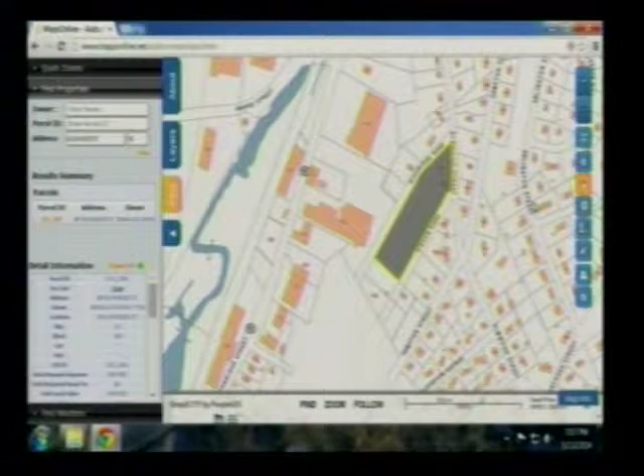Did you dig it out before you put the regrinds on? Yeah, I dug out wherever it was, basically to level it out, then filled it up with about 10 to 12 inches of stone, and put the regrinds on top of that. Well, this isn't a public road anyway.

Yeah, it's a private road, but there were some issues with the neighbor - they were always getting stuck down there. They're very happy now with the road. The neighbor at 90 Elmwood Street was always bailing her out and pulling her out because she used to get stuck, and we've resolved that issue. So overall I think it's a nice plan, private road.

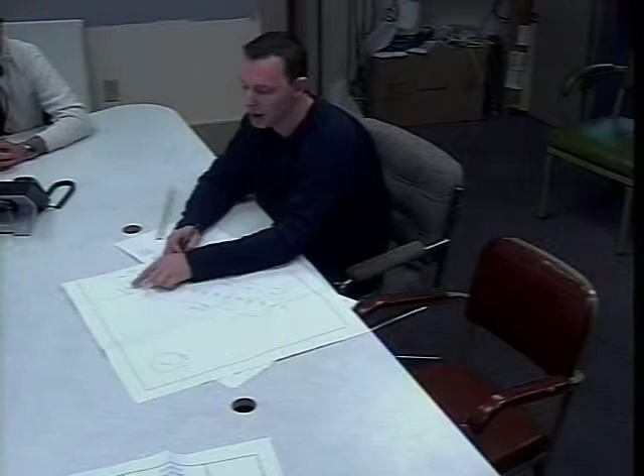There was enough frontage when I met with the engineer originally. The lots are big enough where you need 100 feet of frontage in a 10,000 square foot lot. I could also upgrade High Ridge Road, but after driving down there, that road only goes about a third or half of the way in right now, and the grades really are not very good on High Ridge Road.

So after meeting with everybody, I just decided to go with what that small little community of 2 neighbors that I talked to wanted, and try to get their support.

All right, does anybody have any questions to ask?

This is the cul-de-sac down here, at the end of Gibson. It's technically not a round cul-de-sac, but that end of it ends right at the end, in that lot on my property, on lot 7. Is this where the house is? Yes, this is where the house is, where the little barn is, where lot 7 is. This is that last lot, and this is the house.

Right, I just went down here tonight and it's round. The turnaround I made basically goes into lot 7 a little bit there. We tried to make it wide enough so you could get down there and turn around. It's not officially a cul-de-sac, but you do gotta make a turnaround, do a few point turn to get out.

How many of you people are familiar with this? Okay, you're familiar with it? I went down there today. Well then, what would you like to...

Well, I guess my concern, first of all, would be, this is an ANR plan. So what is within our purview to...

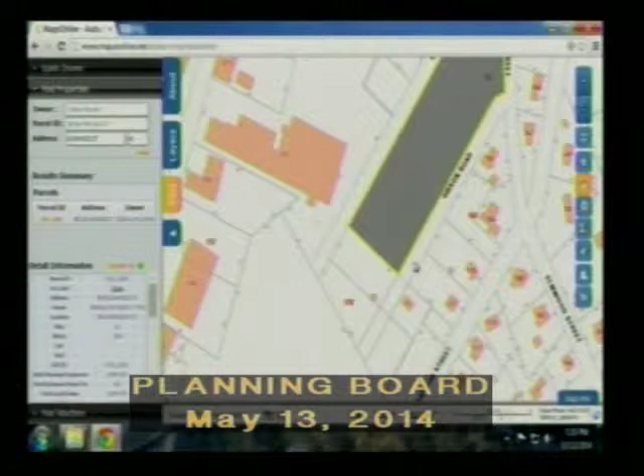That's the other thing about this lot or this road - these lots down here are odd at best, and whether or not it's 9 lots or 10 lots is not an easy determination.

Yeah, I guess I appreciate what he's trying to do. He's working with the neighbors. He could have done a more high density development over here. He's trying to be respectful of that.

We've done projects where we put down road grindings. They're plowable, not great plowable. Issues do come up - the long-term issue of it. I went down there - as far as grindings go, I'd love to see it expanded.

But under what we have right now, I understand if you pave it, you now have the gravel - the grindings are pervious. So if you pave it, now you have to get into laying drainage, doing all the stormwater issues.

I guess I have an issue with the way our regs are written again, looking at the issue we've had a couple times now, which is a policy for the long-term acceptance of private streets, and a little nervous now about us approving something that will in 10, 15 years become a potential liability for the town when those petitioners come in. So I don't know if that's his problem.

I think maybe as a board we have to push to get the town to put some new policies in that maybe prevent this in the future, and also have set policies for the long-term acceptance of private streets, so that when people come into the town and buy a lot on Gibson Road, they know in the long term that this is their liability. It doesn't meet the thresholds for the town, and they will have to bring it up to a standard if they want that to happen.

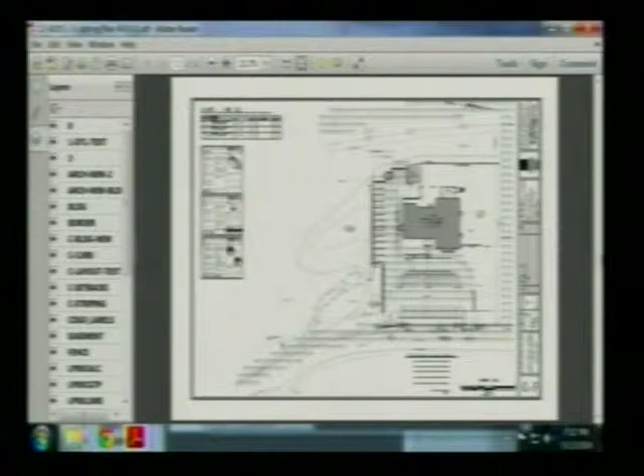Which one would you like? The big site plan, just so it's up there. That's good. Easy.

Okay, we ready? Why don't you make your presentation, and then the board members will ask you whatever concerns they have, and then we'll go over the responses to the engineering designs from Graves Engineering. Okay, my name's David Feist, I'm the project civil engineer. Since the last meeting, there's a few changes we made based on our meetings with the Conservation Commission, as well as discussions with the town engineer. I'll just go over briefly what the changes were.

One of the main things is the town enacted in February a new 25-foot no-construction zone around wetlands. Because of that, we had to shift our detention basin back a little and move 3 parking spaces that were here back to the rear part of the property next to the garage. In addition, we're showing concrete curb stops here for these parking spaces, along with some bollards to define where the walkway will go between the parking spaces and the front entrance. Also, in speaking with the town engineer, he's asked us to camera this pipe - the 24-inch pipe which carries the intermittent stream across the property.

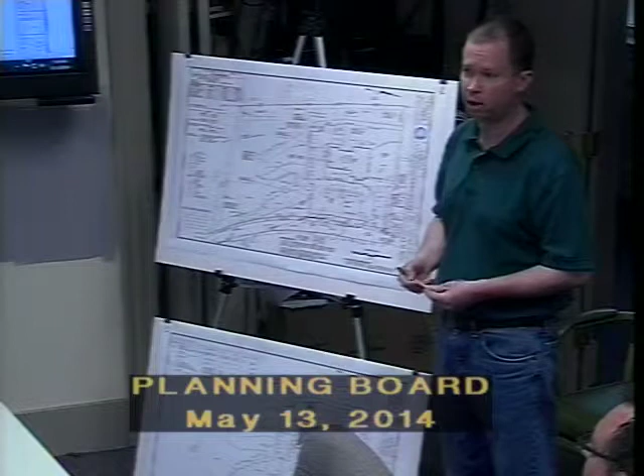We've also applied for an amendment with the Conservation Commission to get permission to do that, because as part of that, they also have to jet clean the line before they camera it. So if there's any silt and stuff, we have to make sure that's included in our order of conditions.

So none of your construction, Joe, is going to interfere with that pipe? You're not touching that? The building's on the other side of it? Correct, yeah, we kept the building about 10 to 15 feet away from the pipe. In addition, Joe will retain ownership of that pipe that carries the intermittent stream.

At one of the meetings with the town engineer, Joe agreed to grant an access easement down here where the ditch has a head wall and the pipe that enters the Auburn Street drainage system, so the town can maintain it. The town also has a catch basin here with a pipe that ties into that pipe, and Joe is also willing to grant an easement for that pipe to allow the town drainage to continue to go into that intermittent stream channel.

The other main change to the plan was we also added a small stormwater basin here. Originally, we had a series of catch basins with a pipe that tied to the drainage ditch with some treatment. After discussion with the town engineer, he felt it was more important not to increase the peak runoff to the drainage ditch. So we're basically keeping about the same amount, maybe a little less, of pavement that goes to Auburn Street now continuing to drain towards Auburn Street. Then an area here, similar to the side parking lot, will just drain by sheet flow to the side into a small grass basin during some storm events.

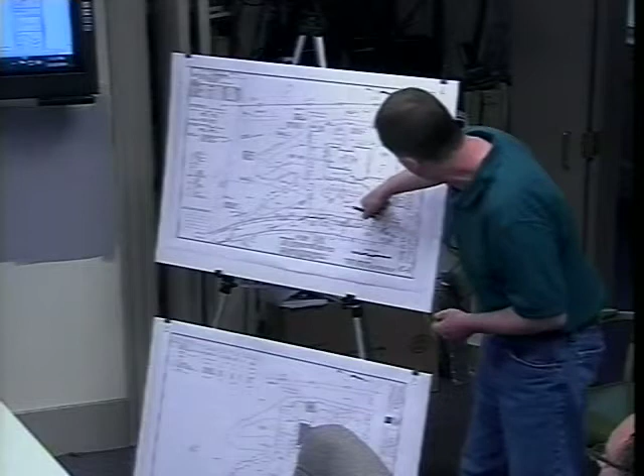With that, those are the main changes. We submitted a letter with answers to some of the questions from before. One of the other questions asked at the last meeting was about the sight distance from this curb cut. We went out and measured the sight distance after the last meeting: there's 328 feet looking towards the highway, and heading northerly on Auburn Street there's 684 feet of sight distance from the exit driveway.

Did you change the name from Richard Weigel to Ken Smith? Yes. Okay, just a question, I saw that on there. It was a joke. You need to be here more.

Jonathan, do you have any questions to ask Joe about the project at all? Is there anything in the responses from Graves Engineering that you have questions about?

Well, do we have... we're going through responses, right? Is this from Graves, or is this Feist's memo? This is Feist's memo, separate. Graves' original memo had 5 items I'd call housekeeping items.

If you'd like them to generate a closeout memo, I can ask Jeff to do that. But I don't believe Jeff has. I know Dave submitted a second set to Jeff. I don't think he's written a memo based on the limited scope of the original. So that memo reflects the new plans?

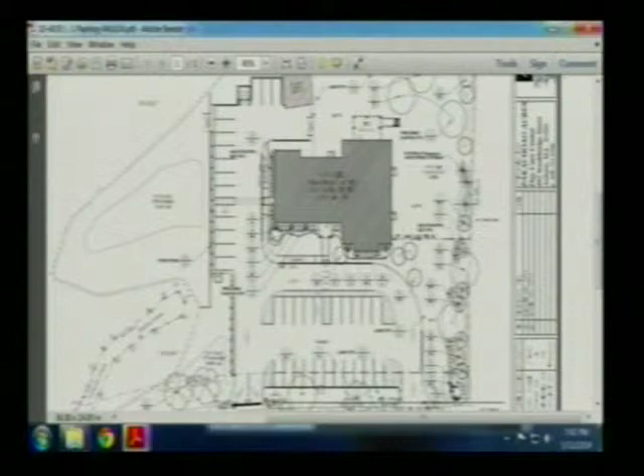A ramp and a tactile, stepping into a parking area where cars will be moving - it just alerts the person with visual impairment that they're stepping into a place where there'll be vehicles. You've got to have the least amount of encumbrances too, because when it snows, you've got to get it plowed quickly, since everyone's coming with the kids in the morning.

Anything else, Wendy? Well, I want to thank you for doing the sight distance measurement. I took a look at the table in the back, and I know it's a 30 mile per hour posted speed, but that's not the reality.

I'm still a bit concerned about coming across that lane of traffic and turning left at the exit onto Auburn Street - the entrance is strictly an entrance, but making that left-hand turn across the lane, I still have concern about. But we asked you to look at the sight distances, and they clearly fit within the criteria.

Would you have a problem, Joe, with a no left turn sign? I mean, you can't enforce it, but you can suggest it. Would it be for the entire time, or just during peak times? No, I don't think so.